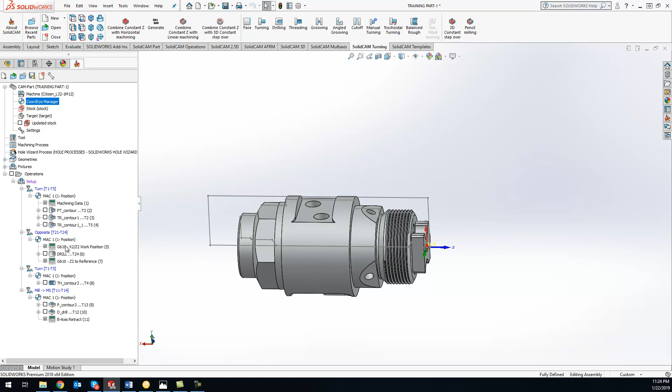With that being said, we'll get the ball rolling here and start where we finished off from last week. Last week we set up our MAC to set up our machine, and like I said before, these MACs are pre-written for you guys by the post processor. So we're setting the machine zero here, doing some outside contours, doing a couple more MACs to align the B-axis, and let's do a quick simulation here and show you what things are looking like.

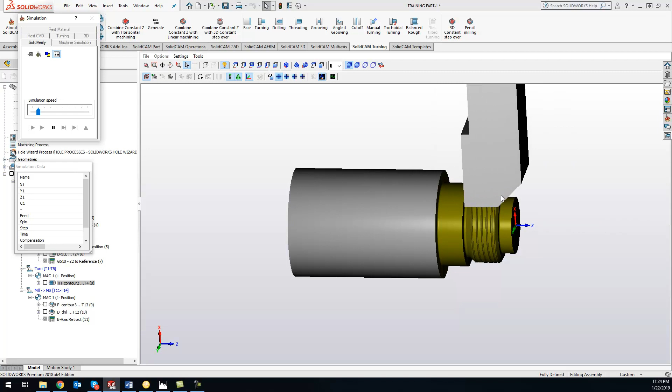So we'll do a SolidVerify first here. So far we faced it off, and we're doing the OD turn here. Doing a finishing, doing our drilling, and we're doing our threading now. And now we're doing our live tooling on that front face here and drilling our holes. Now let's take a peek and see what that looks like in Machine Sim, just to kind of get you guys up if you guys are forgetting from last week.

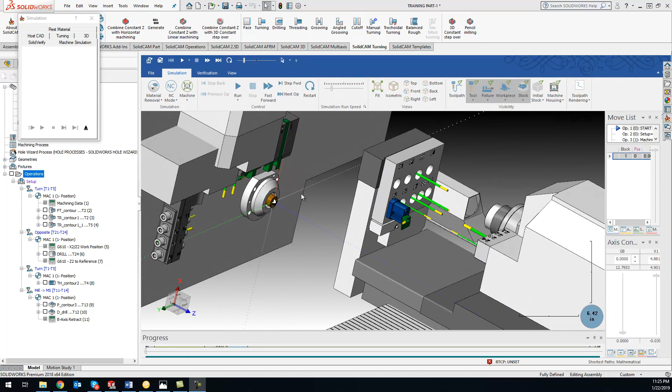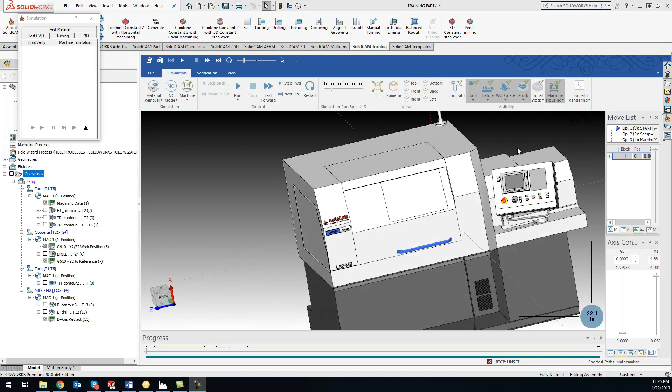All right, now we have our Machine Sim pulled up in here. Here's our main spindle that we're working on. Here's our tool number 1. And all the tools are labeled in the Machine Sim for you guys, like I mentioned last week. So we got main spindle over here, sub spindle over here. With this Machine Sim, you will have the full ability to show the entire machine itself. We can do a transparent, or we can just get rid of everything there.

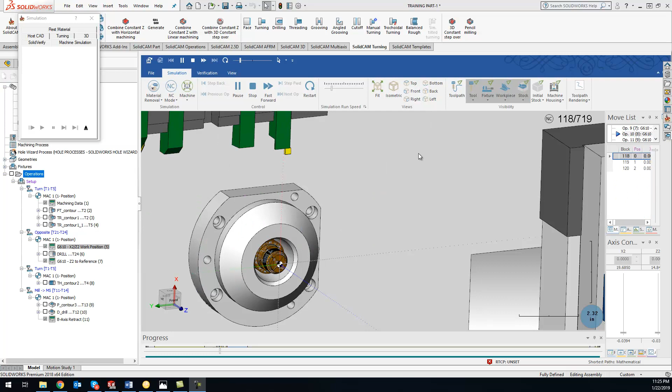So let's zoom in here and see what we did so far. We're facing off the part, doing the OD turn, finishing the OD turn, doing our drilling, now we're doing our threading, and now we're doing our live tooling.

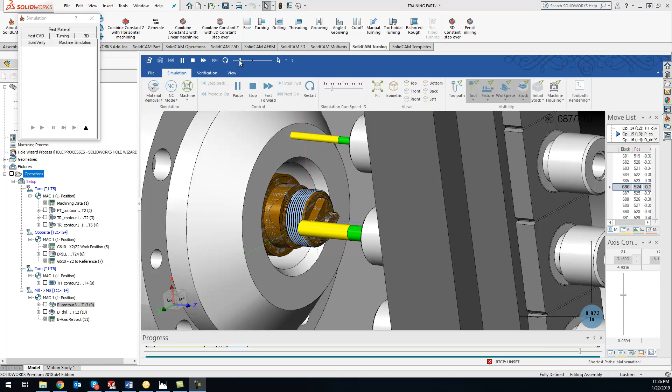Doing a reposition here. I got it going really slow right now just so you guys can get a good view of exactly what's going on. And doing our face drilling. So that's where we left off.

So now we need to finish some more stuff on this part on the main spindle. What I'm going to do is start off with doing these flats up here. Now what I'll need to do is create a coordinate system where Z is perpendicular to that face. Technically I would want to create 3 of them because I have 3 of those flats, but what we'll actually do here to save us a little time is create one operation and then transform that around. So we'll just do a quick pocketing operation here.

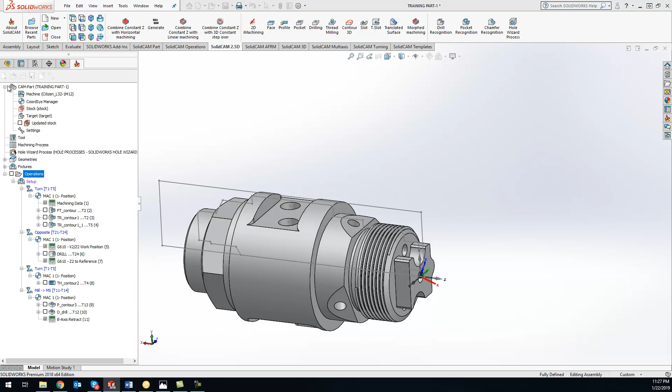Since I need to create a new coordinate system, I can go over here and add one, or I can just click on the coordinate system button right here. We'll do add, and what I'm going to do is keep it relative to coordinate sys 1. All I have to do is click on that top face, and it will align my Z-axis with that face. I'm going to flip around to get my X-axis going in the right direction. Hit OK.

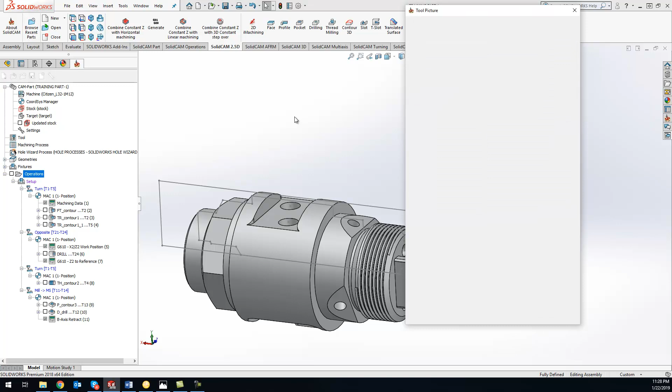Now we can start grabbing our pocket geometry. I'm just going to use the Smart Face technology and click on that face. We'll go ahead and grab our tool here. I'm going to be pulling the live tooling from the B-axis head, which is going to be my tool number 13 here.

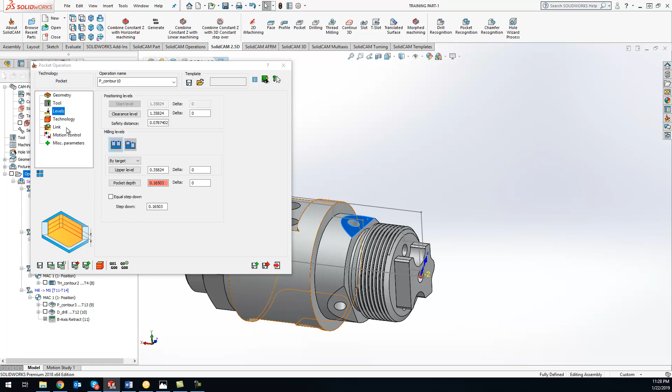And levels - just as a quick sanity check, like I said before, when you're picking your levels, grab a couple different spots there just to make sure that number's not changing. If that number's changing, that means our Z is not perpendicular to that surface. So we want to make sure that number is coming up the same no matter where we click.

Since we are using pocketing, it knows that it just needs to do one pass to make it through. So let's take a quick preview of what we're doing here. So we just machined that one flat. We'll do a quick sanity check - so we're yellow, so we're right up to size, which looks good.

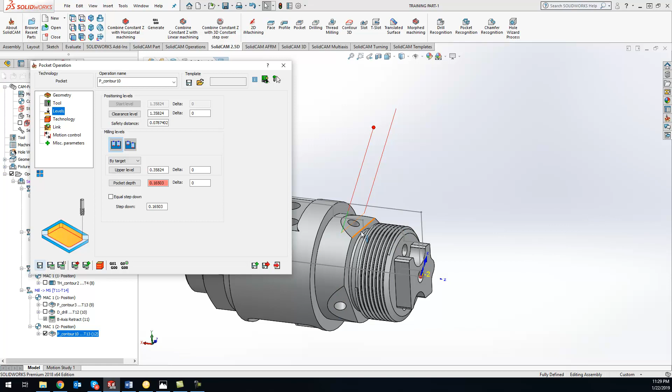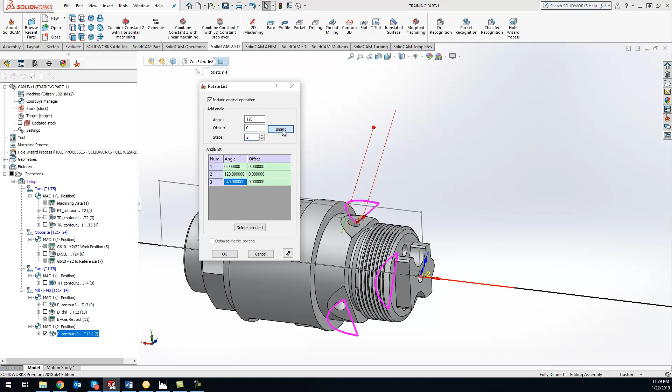Now, like I said before, we have to have a coordinate system for each rotation, but what we can take advantage of is the transform feature inside SolidCAM. We will do 4-axis, and we'll do include original. Since we have 3 of these faces, 360 divided by 3 is going to be 120. We'll insert 2 additional in there, and you can see it projects it around for us.

So to get a better view for you guys - hit OK, save, and we'll do a quick simulate here and do a solid verify.

Let's do a quick check. Yep, everything looks good, we're yellow all the way around. Let's check this side real quick, and that's yellow too. So we're good to go.

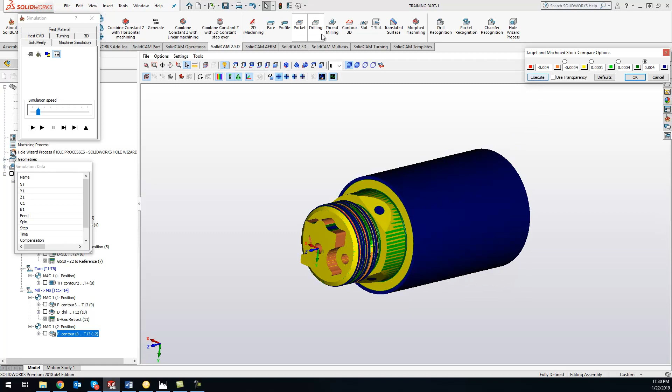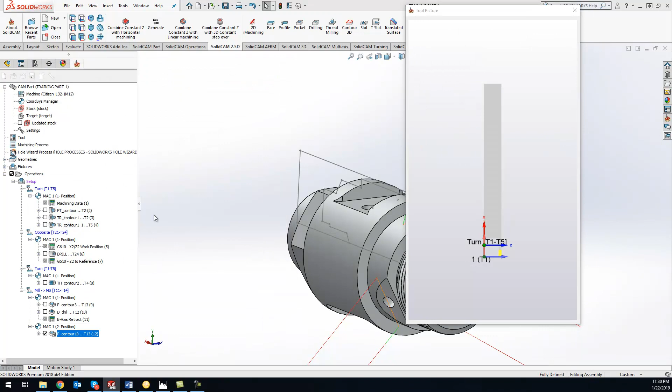Since we're already working along that, doing those flat parts, we'll go ahead and do the drilling for those. Pretty much the same thing as what we've done before: new geometry, grab that face, grab our tool here, same tool area as before. So we want to use our live tooling, tool number 12, which is a 0.118 drill.

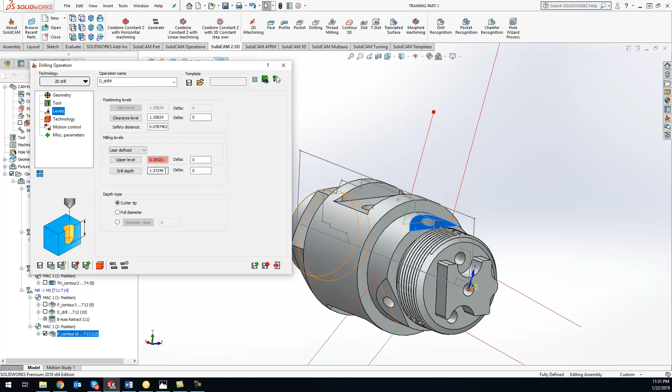Levels, like I said before, upper level, just go ahead and click around. Since we already did our milling, we know our coordinate system is good. Now what I'm going to do is navigate and get our point. Our numbers have updated, so we'll just do a straight drill.

So we can just do save and calculate. I got my feed rate a little too high here, so just bump this down. Save and calculate, and let's go ahead and do a simulate real quick. There we go, so we got our drill hole there.

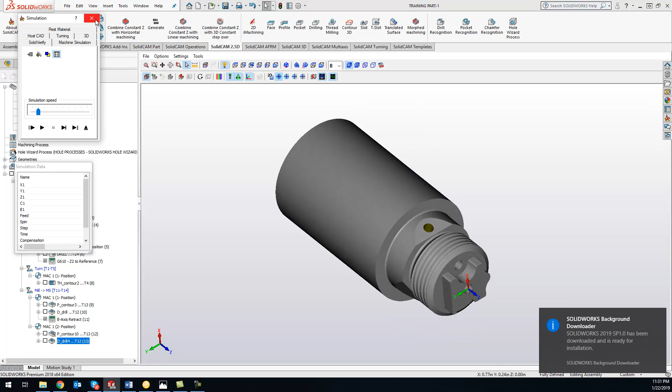So now we'll do that exact same thing as what we did with the milling, the transform: 4th axis, include original, 120 degrees.

And you see we drilled all the way around. So let's go ahead and play both of these operations through in MachineSim just to make sure everything's 100%.

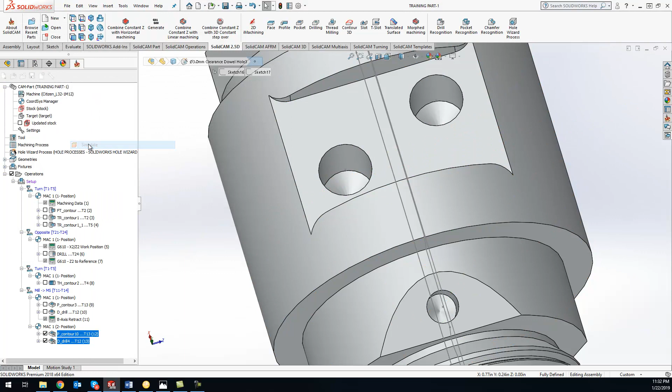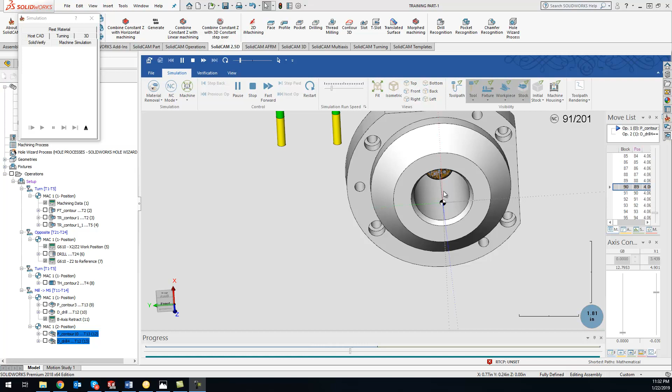All right, so now get oriented around here, and we'll go ahead and play this through. Does the one flat, another flat, and goes pretty quick on these flats, doing our drill, and our final drill there. So we are looking good.

So now what we can do is go ahead and mill off our flat right up here. For that particular one, we're going to want to do another pocketing operation. And we're going to need to create another coordinate system just for that, so the Z is pointing in the correct direction. So we'll just go ahead and click on CoordSys and add.

And we're relative to CoordSys 1, so I'll just grab that face right there, orientate my X and Y's, and accept that.

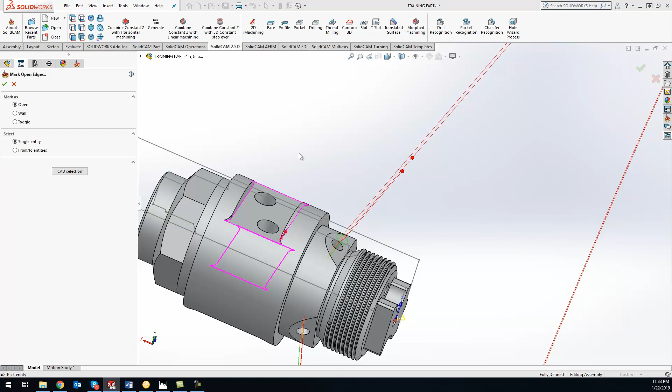Now I'm going to do mark open edges here. The reason it didn't automatically mark these as open is if you look right here, here's my wireframe of my stock. I didn't turn it down to size, so that's why it's not marking these as open. So I'll just come in here and mark it right there.

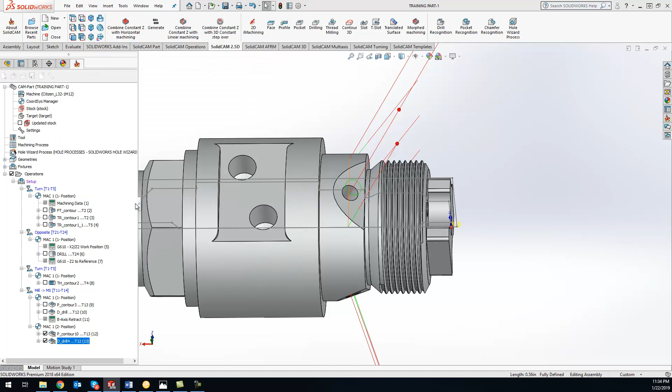And for our flat, we will be using our live tooling again, on our B-axis. Levels, and like I like to do is just click around just to make sure that number is not changing.

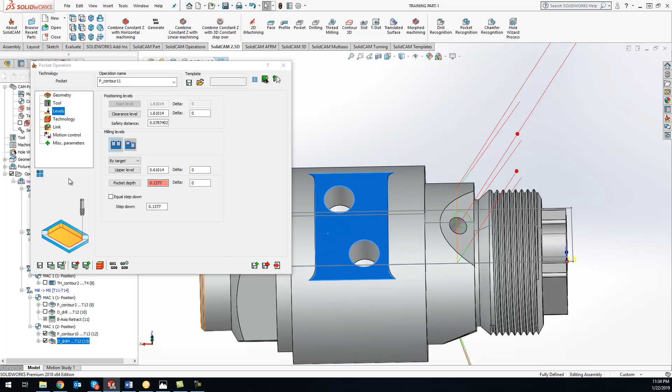Looks good, save and calculate, and let's go ahead and simulate this. Let's just make sure we're up to size here. So we're showing yellow, which is excellent. Let's just see what it looks like in Machine Sim for you guys.

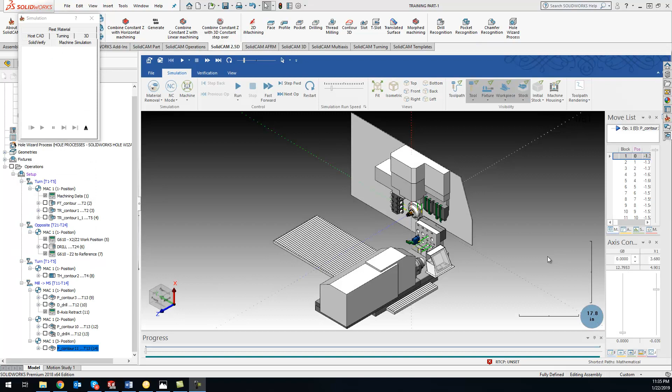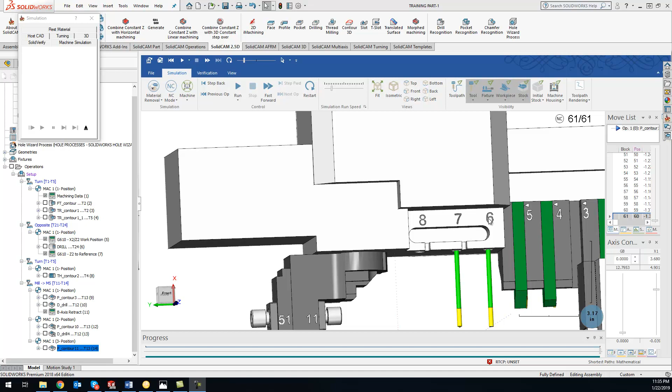All right, so we got our Machine Sim pulled up here, and let's go ahead and play this through. This is using our live tooling down here on our B-axis head. Now we could do this exact same operation using tool number 6 right up here as well. So a couple different ways of going about that for you guys.

Now we'll actually use that in a different scenario when we go to program this wrap functionality.

Okay, so we got our flats right here machined now, and now we just need to drill those holes. So we'll go ahead and do drilling. And we're going to be using that same position. I can just click on that face, and that should grab our holes, yep.

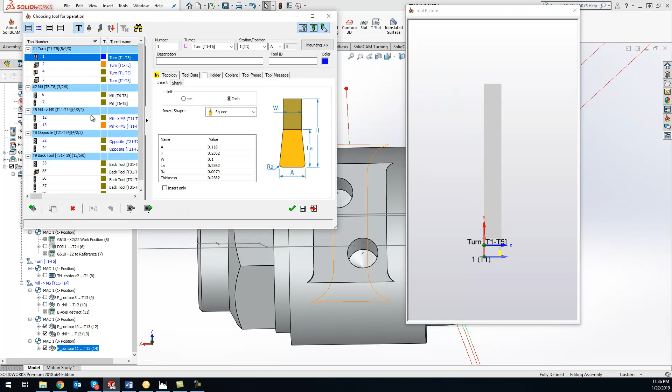And for this one, we are going to use the live tooling that's right above the spindle. That's just to accommodate because that's where that size drill is actually located right now.

All right, so upper level, it's going to be right here. Lower level, we're going to drill down to that point, save and calculate, and that feed rate got me again. So let's bump this just to 8, save and calculate.

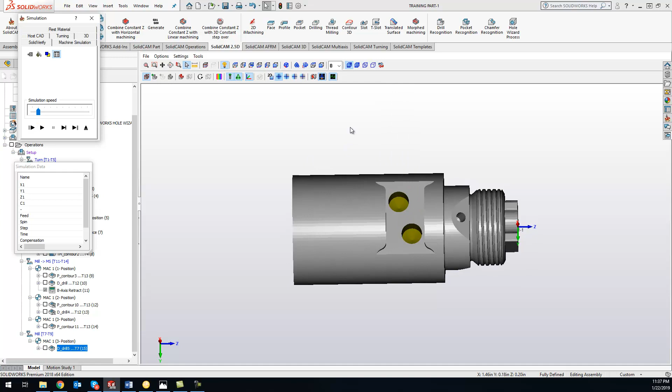Do SolidVerify here, and we're right on size, so we're good to go.

Okay, so now that we got those done, I'm going to go ahead and turn off all my wireframe of what's going on here. What we're going to focus on now is the other side of this part.

And this is where we're going to use that live tooling that is right above the spindle. So we'll do a pocket right here. And for this one, since we are going to be wrapping the geometry, we'll just use MAC 1, position 1 here.

And what we're going to do is do a wrap around the Z-axis. Make sure you always grab that wrap first before you grab your geometry. And do our auto chain, and we'll go ahead and grab our tool.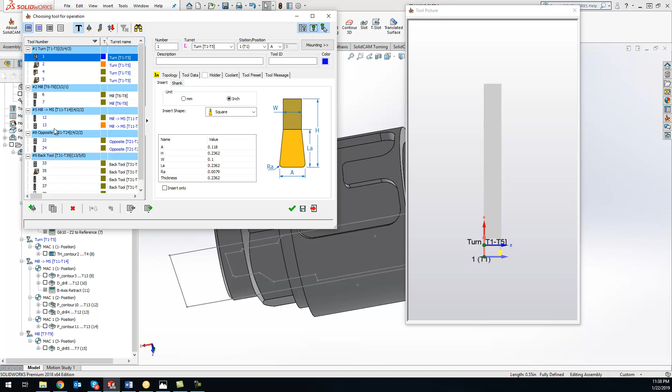And with levels, it doesn't matter where you click, just click on the outermost diameter and the innermost diameter, and that's going to populate our numbers for us. Since we told it it's a wrapped functionality, it knows it's basically going to revolve everything that's going on there. So just click on the outside diameter and where you want to mill down to, and it'll do the calculation for you.

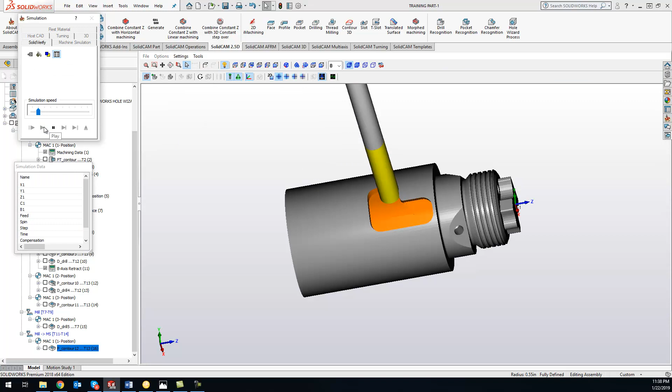So we just do save and calculate here. And let's do simulate, solid verify. And there we go. So that tool is a little bit large for what we're doing.

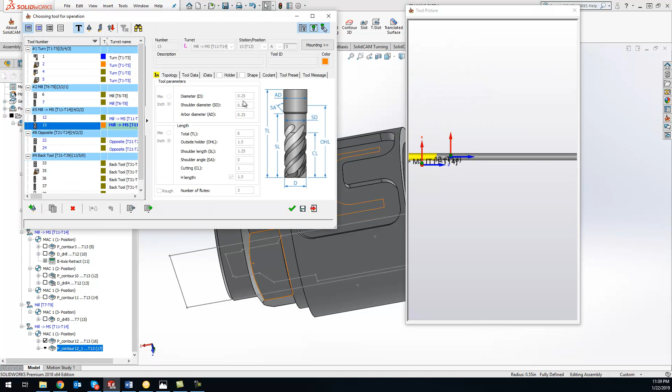So what I'm going to do is just make a copy of what we just did and switch it over to a smaller tool. We were using tool number 13, which is a quarter inch, and now I'm actually going to use a smaller tool, tool number 6.

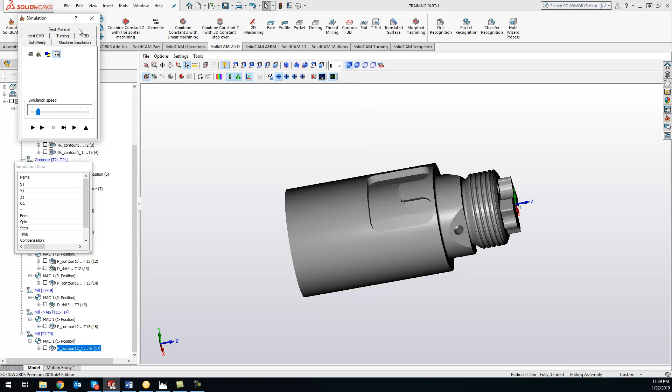And this is actually going to be coming from the B-axis head here. Level should be set, so we'll just do save and calculate. Do solid verify. Just cleaning up our corners there. This is also kind of testing the functionality of the machine to make sure everything is good on the machine. So let's go ahead and play this through on the machine sim here.

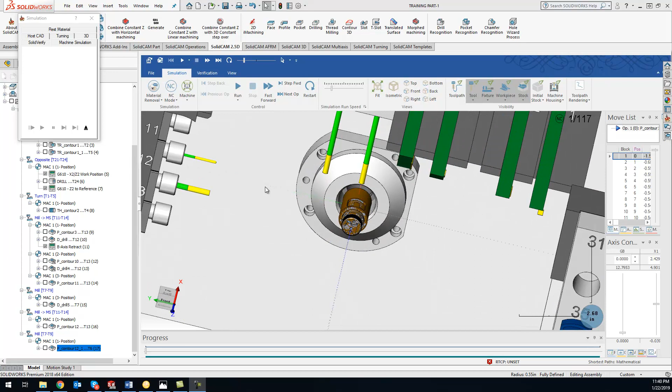All right, we got our machine sim pulled up. You can see our other operation has been done. Let's go ahead and play this. Looks good.

Okay, so now that we got our wrap functionality, we're basically done with everything on the main spindle itself. So what we need to do now is get everything kind of set up for transitioning this part over to the sub spindle. So what we're actually going to be doing here is we're going to get everything kind of ready for the cutoff.

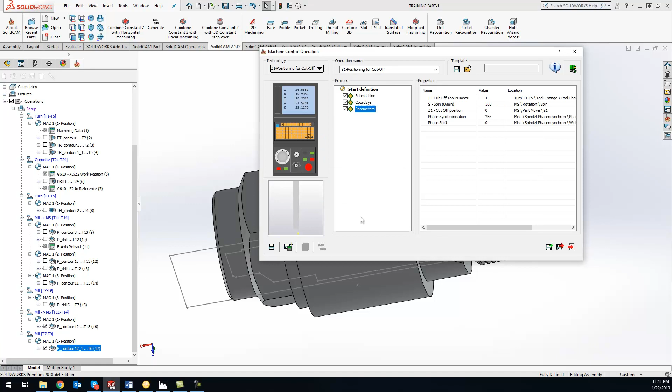And this is all kind of done with your MCO. So all you have to do is come up and do an Add Machine Control Operation, which is our MCO. And what we want to do first is get our main spindle positioned for cutoff. This is going to be our Z1 - how Daniel labeled these, Z1 is your main spindle, Z2 is your sub spindle. So we're getting everything positioned for our cutoff right there. Let's do save and calculate, and we can hop out of there.

Now what I want to do is get the sub spindle aligned up for it to do a parts catch. Basically, our main spindle is doing the first half and our sub spindle is going to be doing the second half. And what we have to do is program it as if our second half is already done. So we'll do another MCO here.

And for this one, we are going to do our sub spindle parts catch, and get it positioned for the parts catch. So basically what's going on here is, this is all set up with your guys' post, but we're telling it to position over to the location. It's going to set up the clamp, turn on the through spindle air blast, and then it's going to unclamp and drop right into the parts catch. So we'll just do save and calculate on that.

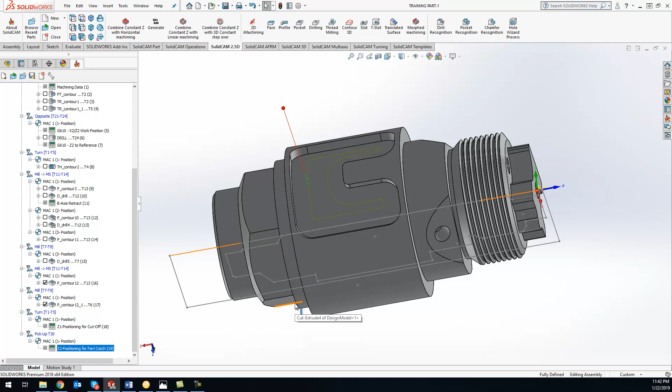So now, now that sub spindle has moved over to drop that part out, what we want to do is align our sub spindle with our main spindle. The reason we want to do that is that sub spindle is going to come over right on location here and clamp on the part, synchronized with the main spindle.

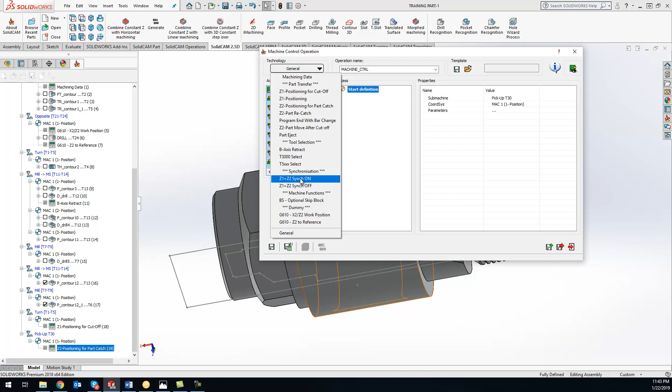So for that, we're going to do another MCO. And we want to do a sub spindle and main spindle sync. So we're going to do Z1, Z2 synchronization on. We're basically aligning our sub spindle with our main spindle.

All right, so now that we have our sub spindle and main spindle synchronized and clamping on with each other, now we can do our part cutoff. So what we'll do is just a simple SolidCAM turning and part cutoff. Grab our geometry here, and I'm going to do a modify and auto-extend it first to compensate for a stock. And grab tool number 1, because that's always our cutoff tool with the Swiss machines.

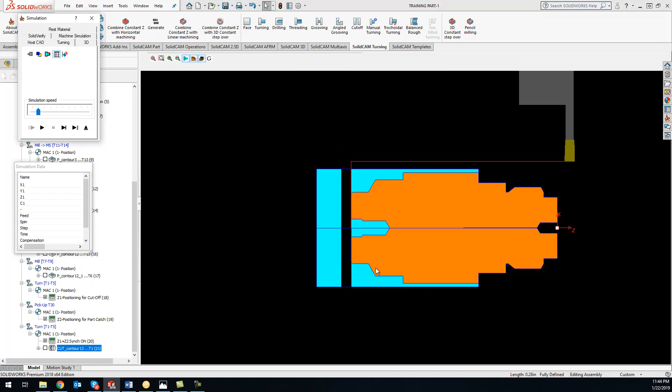And levels are good, technology looks good. Save and calculate. Let's go ahead and see what this looks like. So turning, and I just want to make sure I'm cutting on the right side. Yep, looks good, perfect.

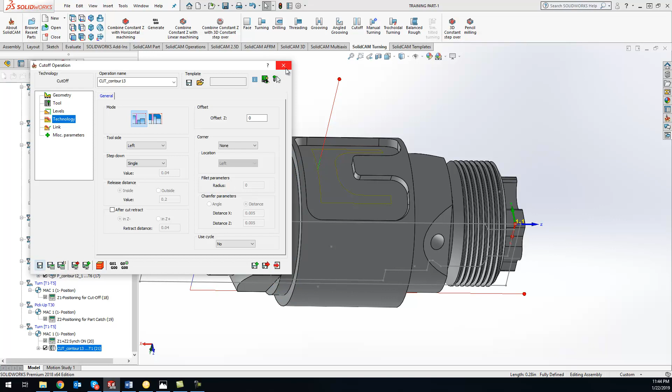So now we have that sub spindle clamped on here along with the main spindle, and everything's grabbed onto. So now what we want to do is end that program along with the bar change. So it's going to shoot out the bar. We'll do another MCO for that.

And we're going to do program end with bar change. Save and calculate here. And now what we want to do is tell that sub spindle to go back to its home position or its reference position. So for that, we'll just do another MCO here.

We want to do Z2 home position, or actually Z2 part move after cutoff. Basically that sub spindle is going to go back to its reference point after it's been cut off. And by doing this, it's telling SolidCAM that now the sub spindle has the remaining stock of this part that we still have to do.

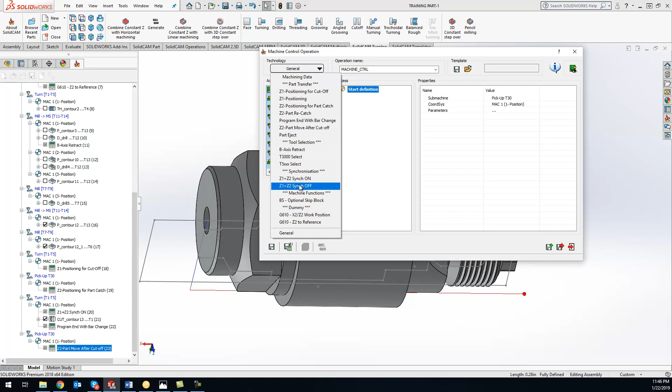Now, the last thing we need to do is unsynchronize both of these spindles. So for that, we can just do another MCO here, and we can say Z1, Z2 unsync, synchronization off. That's basically telling it now the sub spindle and the main spindle can do different speeds and feeds and so on and so forth. So just do save and calculate there.

Let's just kind of play through what we just did here. Now this looks like a lot what I just did here, but once you guys have this set up in your tree, what you can do going forward with any part is just highlight these operations and create this as a template. So when you bring this in to do a part transfer, it's going to include all of the correct MCOs.

It's going to do your cutoff for you. The only thing that you will have to do is go in there and just add that line in there for your geometry.

So giving an overview, we're just getting the sub spindle ready for cutoff, and then we're going to position the sub spindle for the part's catch, and then we're going to get rid of that part in the sub spindle, and we are going to take that sub spindle, reposition it over to where the main spindle and the sub spindle are lined up and synchronized together. We're going to cut the part off.

Then what's going to happen is that part is going to clamp and just move a little bit out of the way and advance forward the stock for the new part from the bar feeder. And then the sub spindle is going to move back to its reference position, and then they are going to unsync from each other so they can go back into their independent ways.

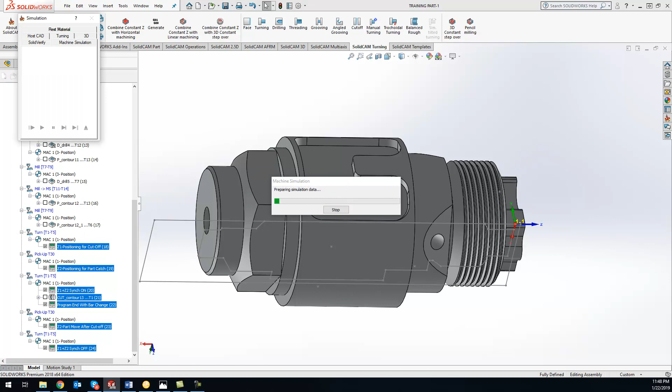So let's go ahead and do a simulate, and we'll do a machine sim on this one. All right, so we got our machine and get a good view of what's going on here. It's going to go pretty quick here, but let's play it.

Clamps on, part cut off, and it goes back to its home reference point.

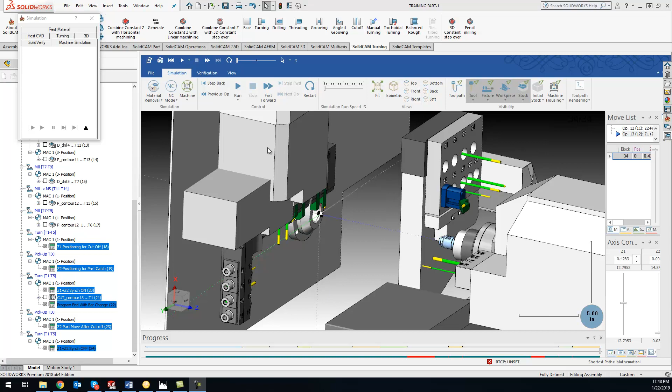Pretty simple, easy. And like I said last week, you talk about Swiss and think, oh man, this is going to be a whole new animal. This is all stuff that we've previously covered in your mill turn and your turning. The only difference with the Swiss is just having these MCO cycles in here, which are already predefined for you by the post processor.

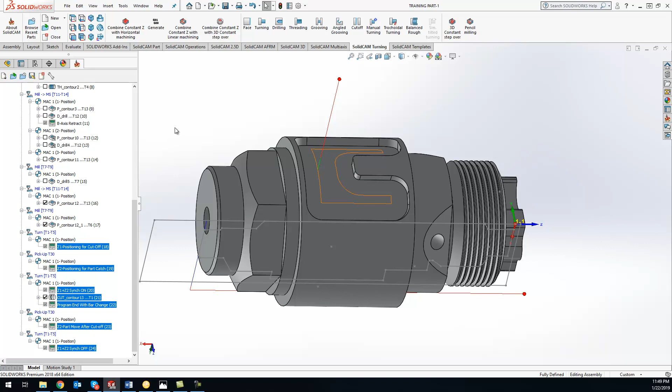So from right there, we are ready to start doing the work on the sub spindle. We'll actually start that next week on the sub spindle and get everything done on it. And then the last class we'll do is the channel synchronization, getting everything to mesh together.